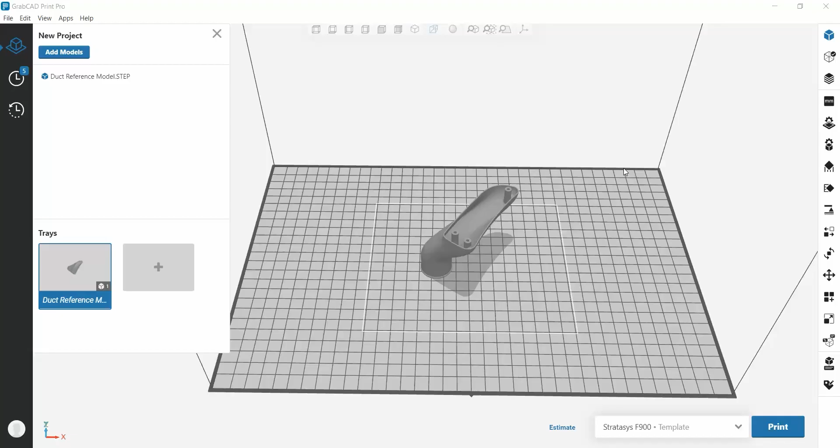Alright, so in this section, we're going to be highlighting the Accuracy Center that is available in GrabCAD Print Pro. So this feature is beneficial for you if you wanted to determine the accuracy of your prints by comparing a scanned STL version of your printed part to the original CAD file.

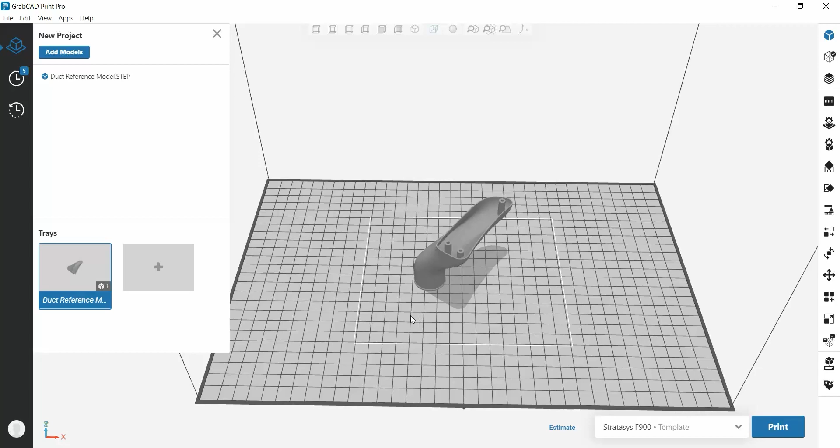Basically, if you believe that you have any inaccuracies or if you have any warping that's occurring to your parts and you wanted to kind of narrow down just how accurate your printed parts are compared to your CAD file. For example, if you have very tight tolerances, this is a very, very beneficial feature for you to use.

So basically, to use the Accuracy Center, first you would import your native CAD file. So here we have just a STEP file of the duct itself. And then what you want to do is you want to import in a scanned STL of your printed part. So here I already have it imported in, but basically it's a duct before scan.

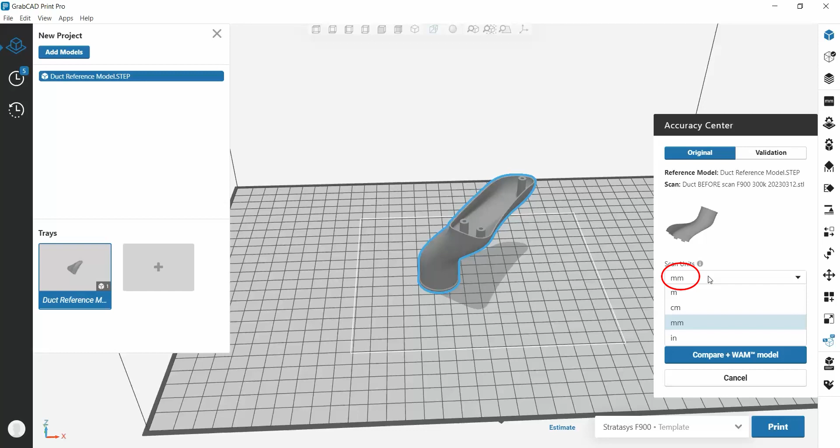It's an STL, and what you want to do is actually indicate the units that your part was scanned in. So here I have it in millimeters. And now all you want to do is click compare, and it will generate a score for you, basically telling you how accurate it is compared to your original CAD file, and it's going to be a score out of 100.

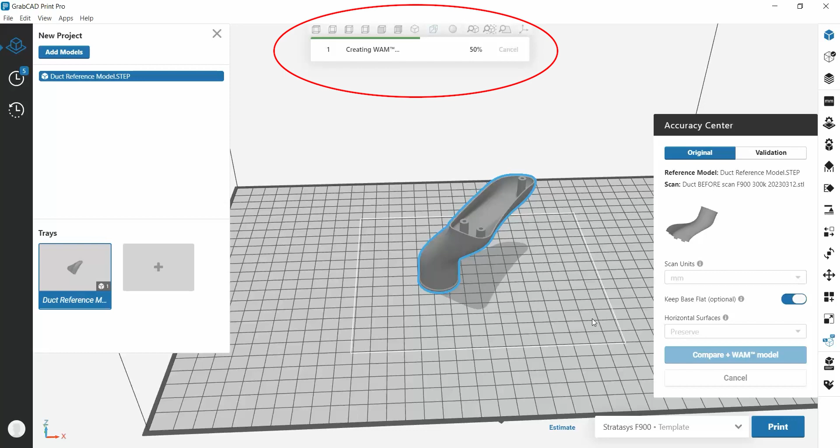Alright, so now that the comparison is complete, you can see a print accuracy score is shown, and it says 29, which is a poor score. So this basically indicates that there's a lot of warping or inaccuracies that are coming out of your print.

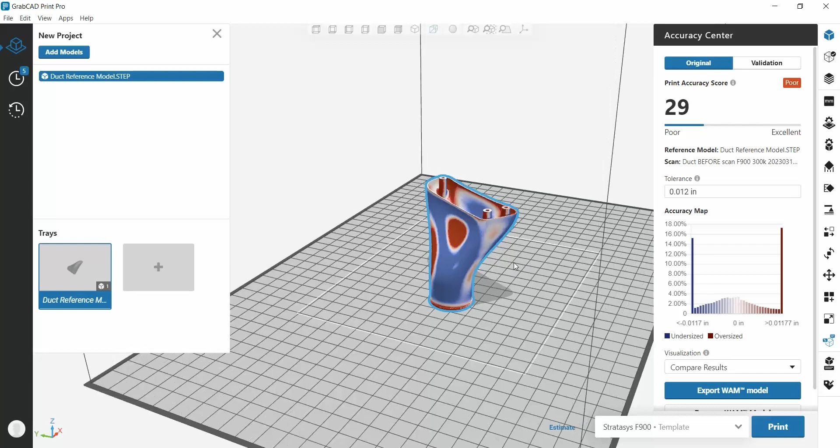And here you have a heat map where if you highlight over it, you can actually see the displacement. You can see around this area it's 40 thou, and because it is red, I believe it is oversized. And here in these blue regions, you can see it is undersized by about 20 thou, or half a millimeter, or in some cases closer to 1 millimeter.

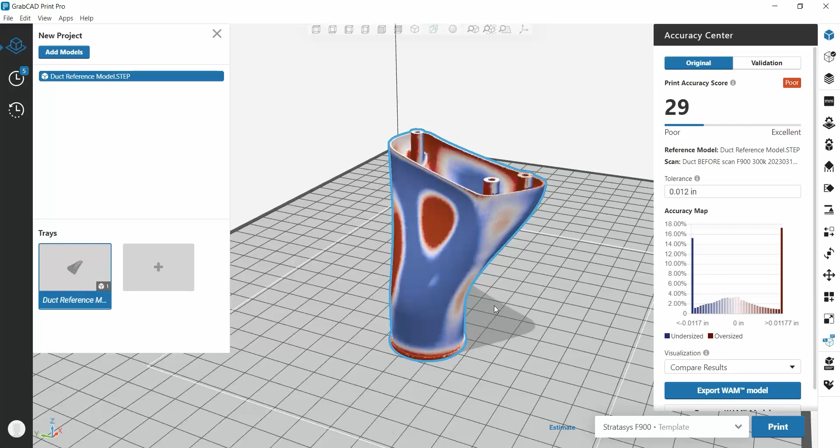So in this situation, what you would then do is click Export WAM Model, and WAM stands for Warp Adaptive Modeling. And when you export this WAM model, it basically generates an STL that will correct for the warpage or any inaccuracies that are present.

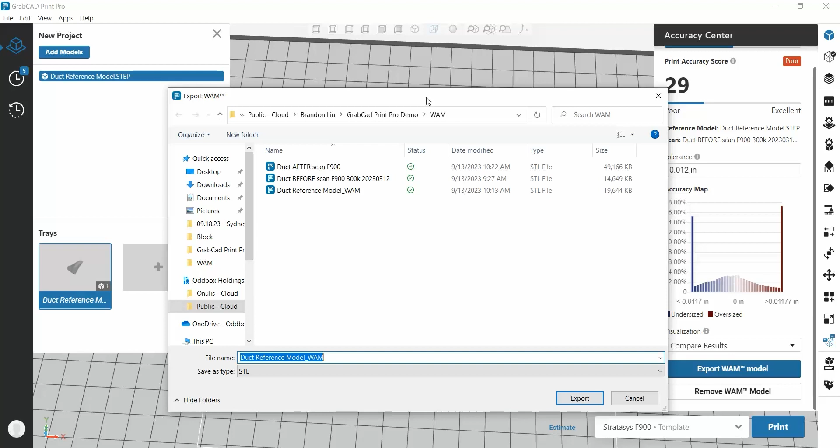And it's important to note that this correction generates a brand new STL, and it does not adjust or alter your native CAD file in any way. So because I already have one, I'm not going to export this one, but once we do that, you want to go to validation.

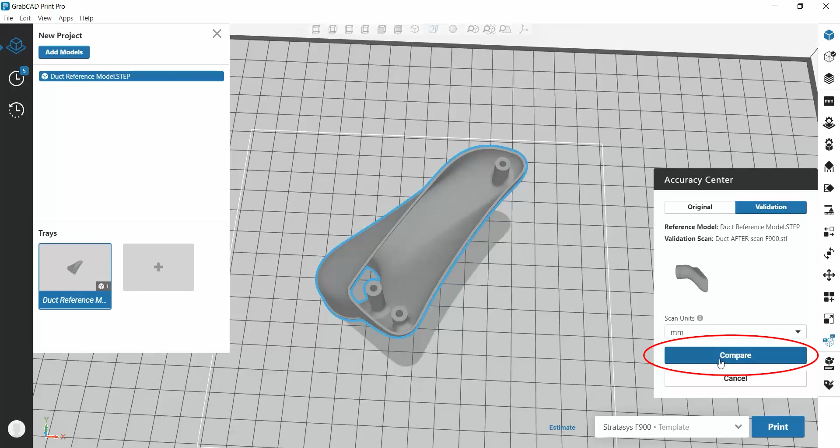And with the validation, this is basically after you print the WAM model and then you 3D scan the printed WAM model. And then once you import that, you can then compare it to the original CAD file one more time in the Accuracy Center, and then you will have, hopefully, what should be an improved result.

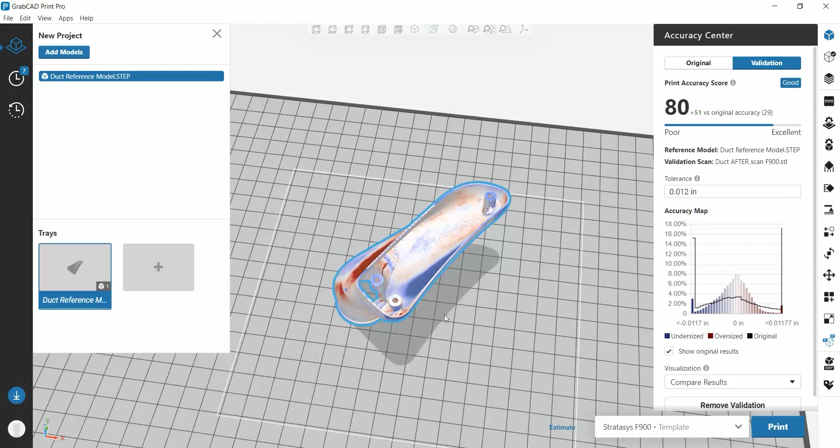Alright, so now that the second accuracy comparison is complete, we can see that it now has an accuracy score of 80, which is plus 51 compared to the original accuracy of 29. And something else to note is that the heat map is much more of a normal distribution now, where the initial displacements used to be around 30 thou to 40 thou, are now 15 to 25 thou.

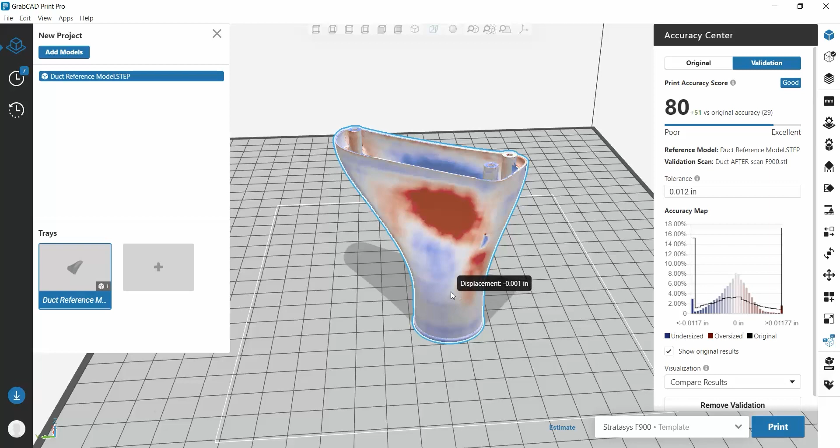And in the other regions where they were undersized, you can see that they are basically non-existent now, where the displacements are only around 2 thou, 3 thou, 4 thou, and the like. One more interesting thing to note is the accuracy map over here on the right hand side.

So you can see in the original STL scan that there are a lot of outliers with very, very large displacements. And when you create a WAM model, what it basically tries to do is kind of a global balancing across the entire part. And it basically forces the outliers down to try to achieve a much more normal distribution across the entire part.

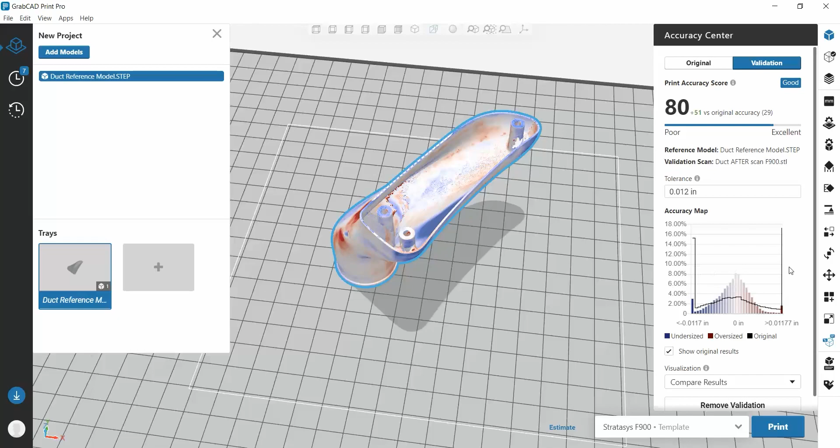So that's basically how you achieve a much more accurate model correcting for the warpages and any shrinkage or any inaccuracies in your part by using the Accuracy Center that is available in GrabCAD Print Pro.